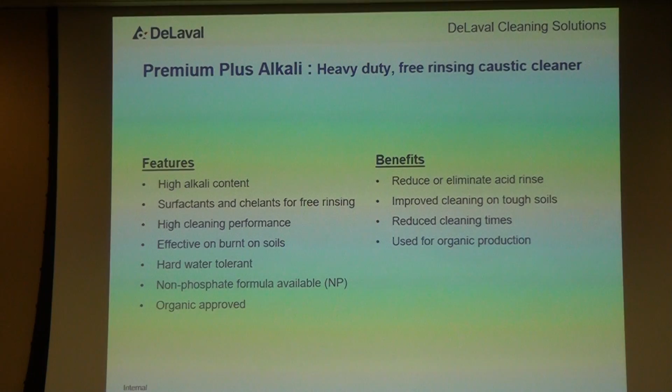It has surfactants and chelants. It's a very free-rinsing product, so that post-rinse step goes on very quickly. It is very effective on burnt-on soils, and it's very tolerant to hard water.

And I should mention, if you haven't seen it, there's this whole trend of organic production, and we are working diligently to get our enhanced products approved for organic production.

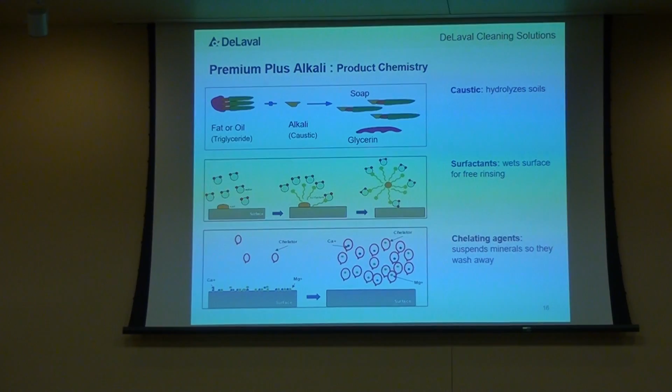So once again, we have three components of this product. We have the caustic that takes care of the organic soils, surfactants that help lift those soils up, and chelating agents that help with any minerals or suspension of inorganics.

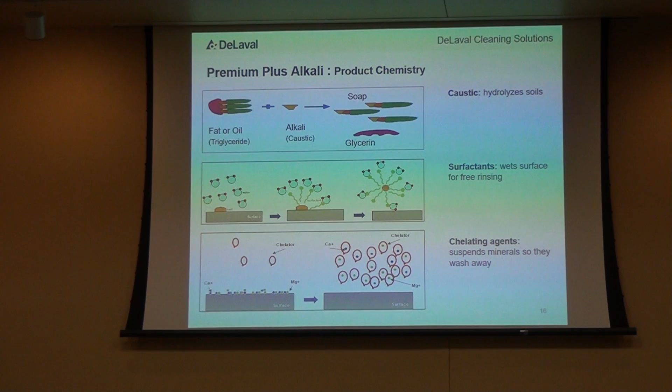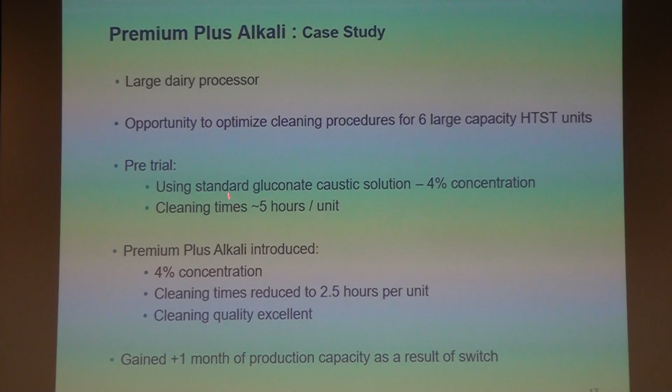The pre-trial conditions: they were using a 4% caustic solution as their cleaning step, and it was taking them about 5 hours per unit to clean it.

We were able to use Premium Plus Alkali at the same concentration, but the improvement here was the time it took for cleaning. We liberated a unit in half the time, which gave them an increase in production capacity—they gained one month of production as a result of switching from their standard product to Premium Plus Alkali.

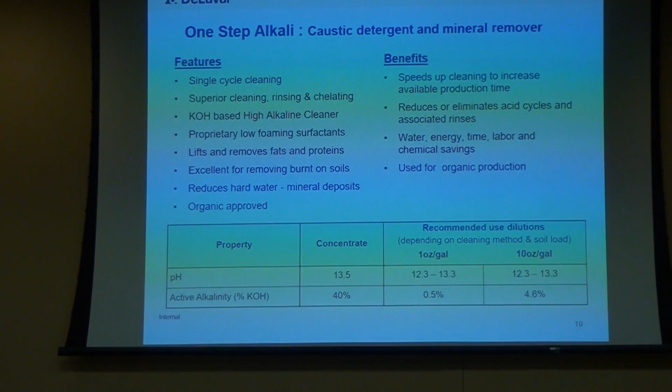The next product is One Step Alkali, and for many customers this takes quite a mind shift. It's one thing to tell them I can speed up your process by running shorter cycles, or clean at a lower temperature, even though that still generates issues.

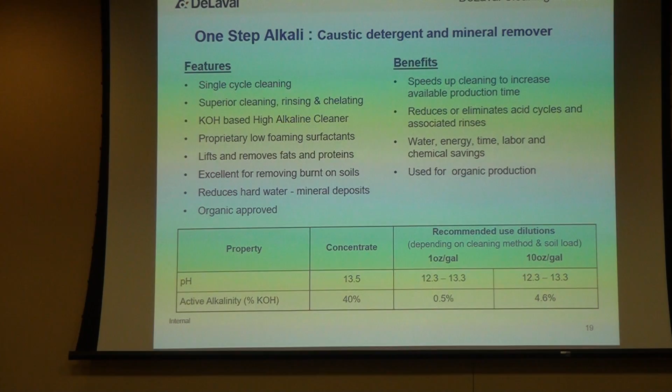I think you've all experienced this—when you buy cold water detergent, how many people still use their washer on warm even though the detergent is formulated for cold water. But this is a bigger step, because we're telling them we want you to skip one of the steps in cleaning—we don't want you to run an acid rinse in your cycle.

So this is single cycle cleaning. We have good cleaning and rinsing. It's a potassium hydroxide based product with a lot of low foaming surfactants that help lift the soils up.

It is excellent for removing burnt soils, and its benefits, as I mentioned, speed up cleaning and reduce or eliminate the acid cycles. So we have water, energy, labor, and chemical savings, but mostly what we're getting here is an increase in production time. It's also approved for organic production.

Similar situation—we have a caustic, surfactants, and chelating agents, just a different formula that allows us to remove minerals from the surface.

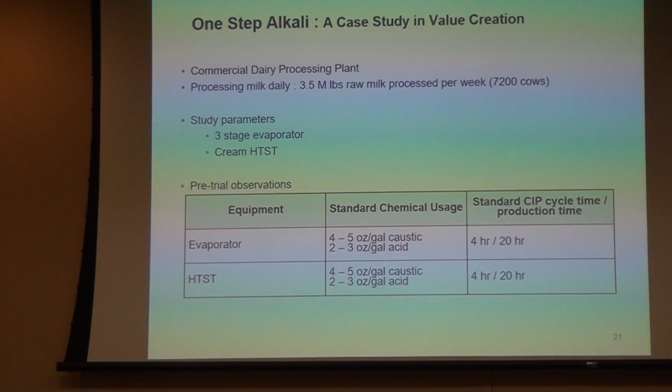This was a different dairy processing plant in the south of the country. It processed about 3.5 million pounds of raw milk per week, and the study was concentrated on a 3-stage evaporator and the cream HTST.

These were the standard conditions: they were using between 4 and 5 ounces per gallon of their caustic solution, and 2 to 3 ounces per gallon of the acid solution. It was taking them about 4 hours to clean, and they were running production for 20 hours—so once a day they were running a cleaning cycle.

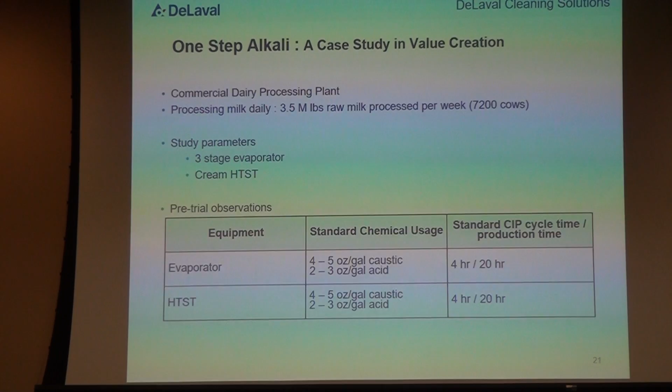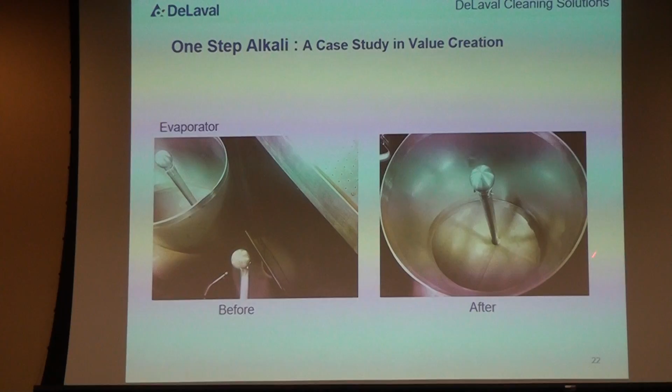Just examples of what we were able to achieve. So just before, it's not that the surfaces were dirty, their system was working well, but we were able to also obtain the same level of cleaning.

The importance here was on the savings. The first savings: because we eliminated that acid step, we also eliminated a rinse step, so we have a lot of water savings. We were able to save 94,000 gallons of water for the cream HTST and 440,000 gallons of water for the evaporator.

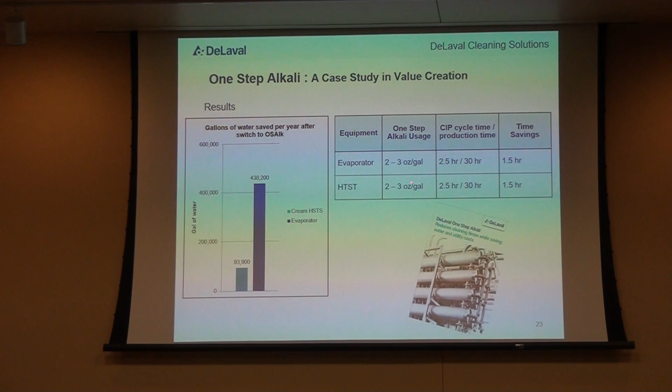The next thing we were able to do is reduce the amount of chemical being used. We were before at 4 to 5 ounces per gallon of their alkaline step. Now we're able to reduce it to 2 to 3, not counting the fact that we're not doing an acid cycle. But most importantly, we were able to reduce the cleaning time from 4 hours to 2.5 hours.

In addition to that, they were able to do longer runs. So instead of cleaning every 20 hours, they were able to go for 30 hours without needing to do a cleaning cycle.

What was neat about this plant is that they were getting ready to do some capital investment because they were short - their system was not able to accommodate all the milk coming in. By liberating equipment a lot faster, they didn't have to do that capital investment. So for them in particular it was even greater savings than what I'm showing here.

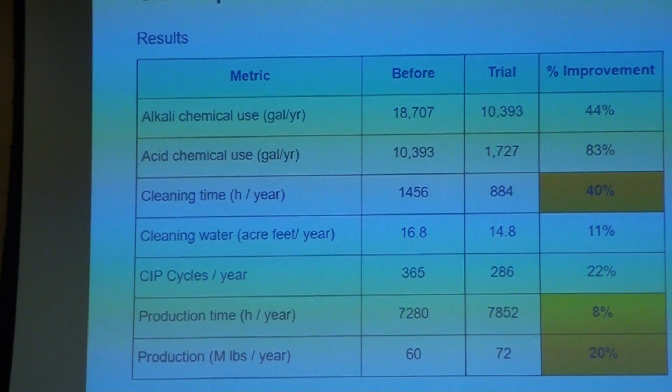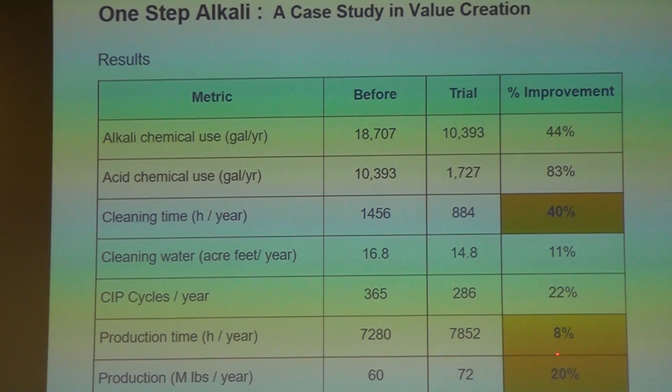A little bit more on the savings. We have an improvement in alkali chemical use and acid chemical use - it's not 100% because they still run one acid cycle every couple of weeks. But we have an improvement in cleaning time, a reduction in water use, a reduction in number of CIP cycles per year, and an increase in production time and production volume.

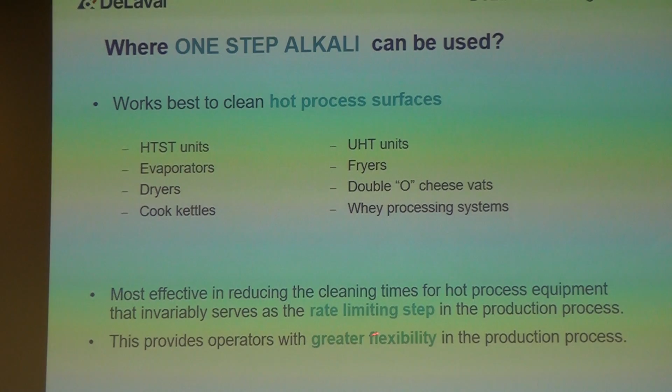It's best for us to use it on hot processed surfaces. It doesn't mean we cannot use it for cold processing surfaces, it's just very good at cleaning burnt-on soils. And we find the most effect with these products when we're able to attack the rate-limiting step in their cleaning process, liberating the facility faster.

The next product I want to talk about is one-step acid. Similar situation here, but we are combining the alkaline and acid step with an acid product, so single cycle cleaning. Again, we clean both organic and mineral soils, eliminating that chlor-alkaline cycle. It's very good in the presence of hard water. We use it for CIP, so it's a low-foaming product, and it's also approved for use in organic applications.

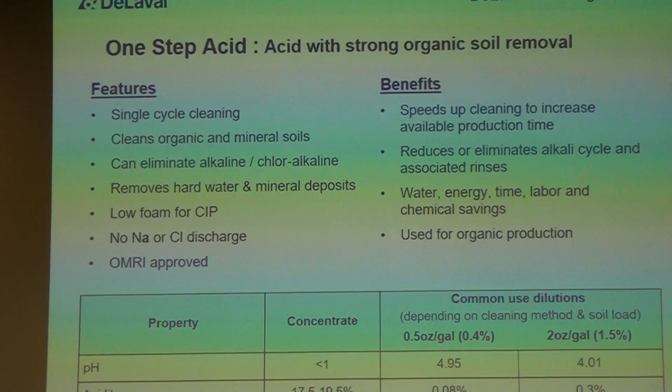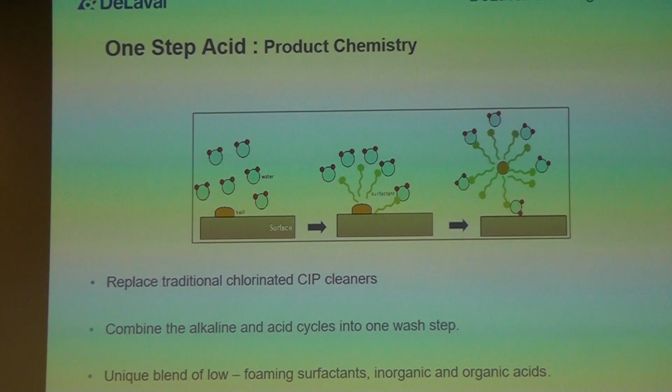Once again, what we're trying to do here is provide the customer with water, energy, time, and labor savings. The idea is that we are replacing the chlorinated CIP cleaners. We need to find a way to lift the organic molecules from that surface - we rely on a lot of surfactants to do that. The challenge is that we're doing this through pipes, so we cannot use very high-foaming surfactants, otherwise the liquid wouldn't flow through the pipes.

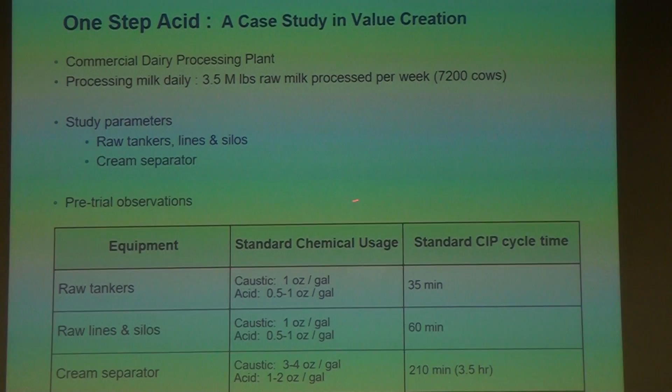This is actually the same dairy processing plant I was showing you before, where we did the one-step alkali study, but this one we did under cold lines - on the raw tankers, the lines, the silos, and the cream separator. They were seeing about 1 ounce per gallon of caustic and 0.5 to 1 ounce per gallon of acid, and their times varied depending on what they were cleaning, anything between half an hour to 3.5 hours.

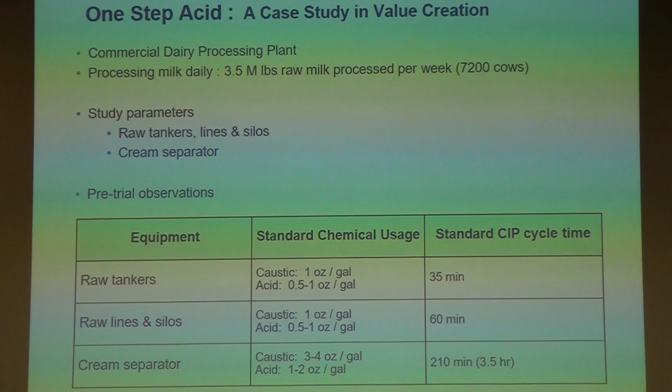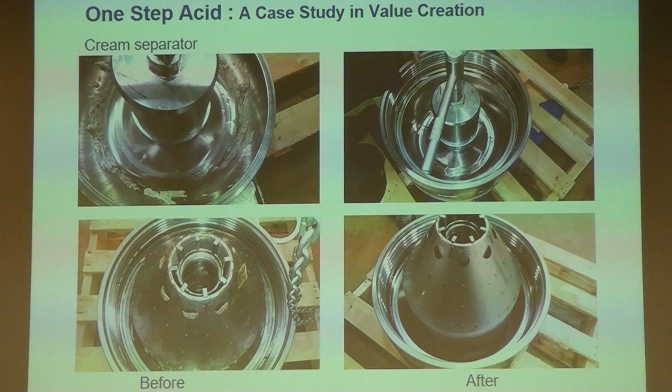So as an example, this is before you clean it. You see a lot of the soil that is present, and after the cleaning, we have very shiny surfaces. So before we even get to talk about savings, we need to render the surface as clean as they're used to seeing it, if not better.

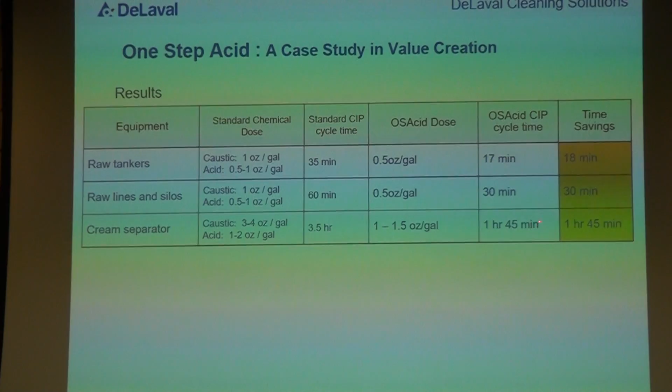Now the real effect of what we were able to do: the first thing is that we're able not only to eliminate the caustic cycle, but we're able to reduce the dose of acid that we're using, so they're between 0.5 and 1 ounce per gallon. And then in all of the steps, we're able to reduce the cleaning time by half.

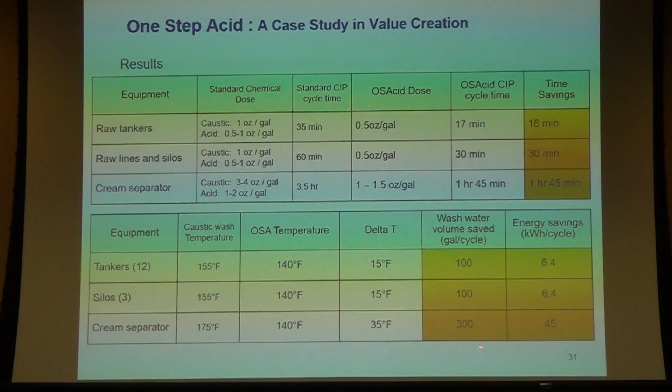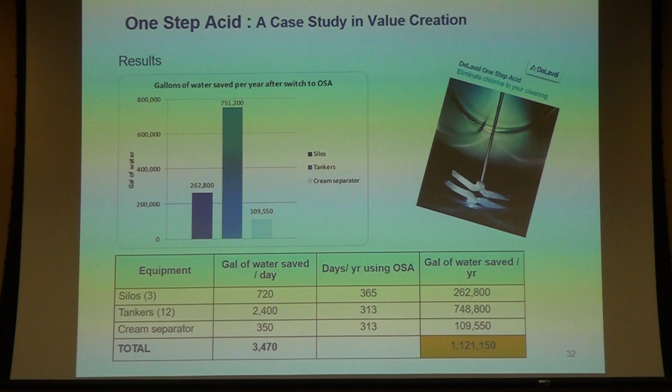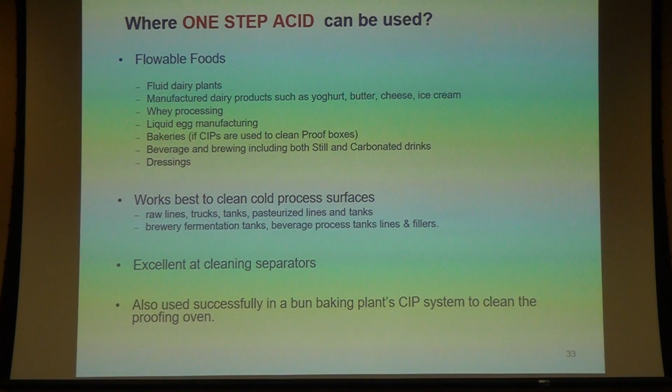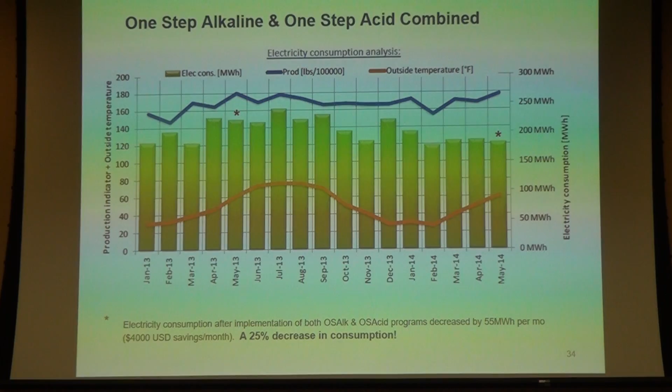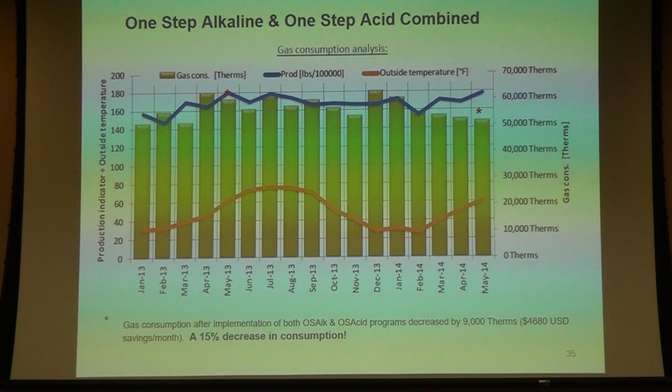So the savings for the company were about 28%. One thing that is important when we do these calculations is that sometimes, because this is not a commodity product, the cost of the product can be higher than standard chemicals. But if you take into account all the other savings, there can be a net savings for the producer.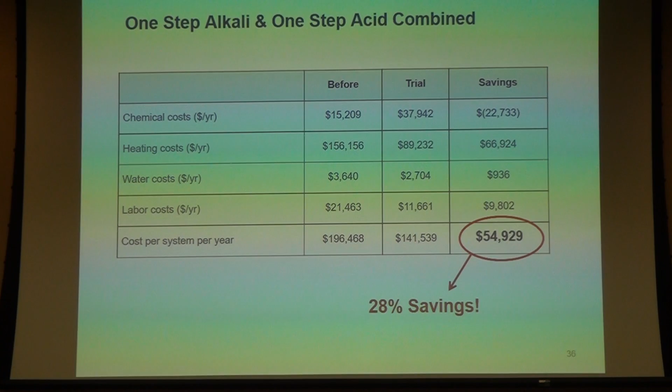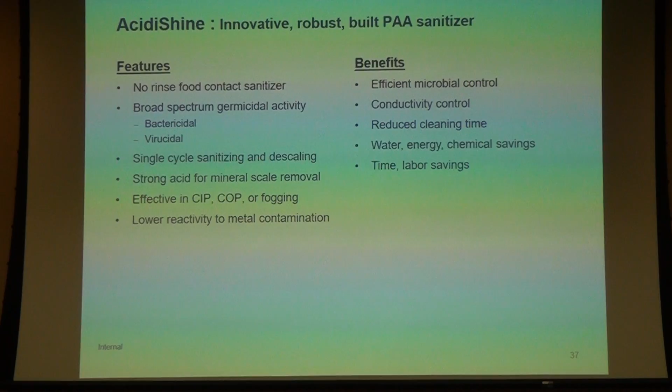Then the final product that I want to talk about is a new product for DeLaval. We launched the product this year. It's called AcidiShine, and it is a built peracetic acid sanitizer.

So peracetic acid is an excellent sanitizing product. It has very broad efficacy. It is well accepted within the industry. It has a very good environmental profile as well—it breaks down into vinegar and water. People are very comfortable using the product.

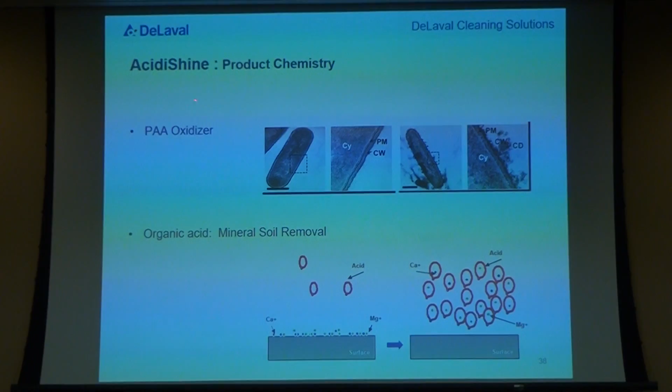What we want to do here, though, is combine the acid step or acid rinse with the sanitizing step. So AcidiShine works in two ways: of course it has the peracetic acid portion that oxidizes the cells, but it also has an organic acid that helps in some mineral soil removal.

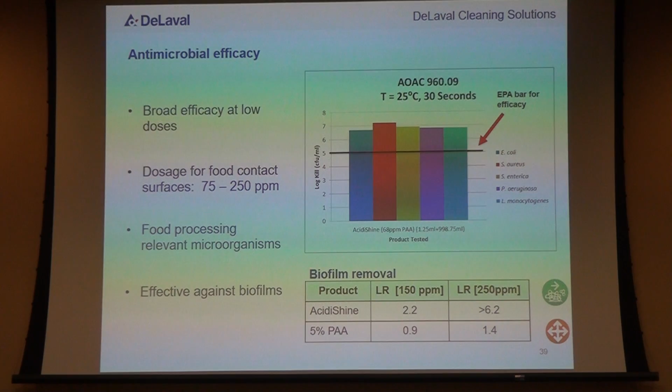And the other thing that is interesting about this product is that we're able to get removal of biofilms. I'm hoping most of the audience knows what a biofilm is, and if you don't, they're cells that adhere onto a surface, and when the cells adhere to the surface, their entire genetic makeup changes—they start turning on genes that...